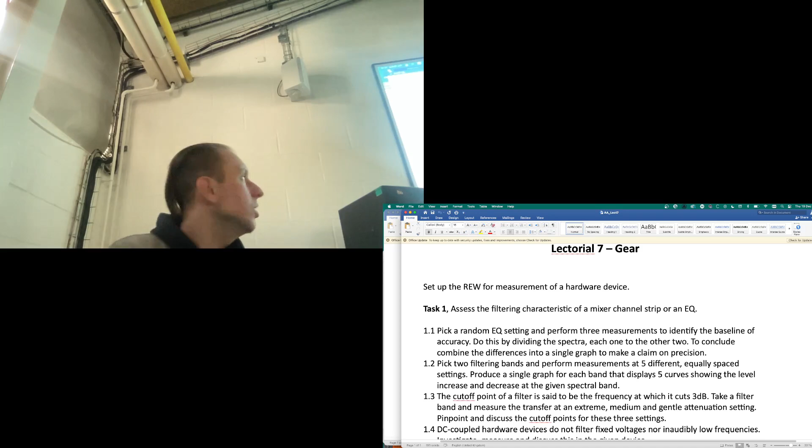So in REW we are doing this by dividing the spectra. And then we can see a single graph that tells us what the baseline is, what we can assume. And on top of that, it's not just a threshold, like everything below 150 hertz is trash, but we can actually express that continuously. We can say that the tolerance increases below 150 hertz, and at 100 hertz it's about 6 dB, at 50 hertz it's already 20 dB, whatever it is. So we can actually quantify that quite neatly as well.

And then what you guys have been doing is essentially looking at the EQ graphs, but measured EQ graphs. And that was quite exciting. Do you remember anything interesting arising from that? The thing was to try and produce a single graph that says it all. This was one of the messages, and also for your final year project, it's still very frequent that we get someone who just appends 20, 30 graphs and says, well, there it is. So please try to avoid this.

A good graph is the graph that you actually spend time looking at, and as you do that, you discover facts about the graph, and obviously if this is part of your thesis, then it's expected that we can read it as well. Okay, so what do you see in this graph?

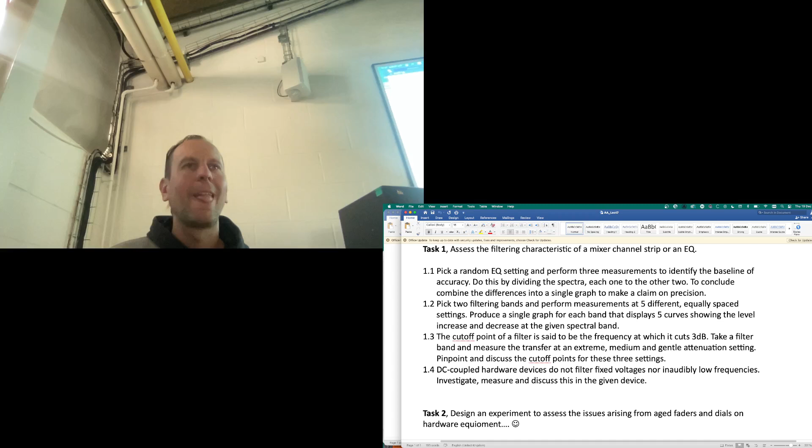And well, maybe it's a good time to get a bit into this because we're talking about filters, and no one else is going to tell you anyway, ever again. I'll try not to get emotional.

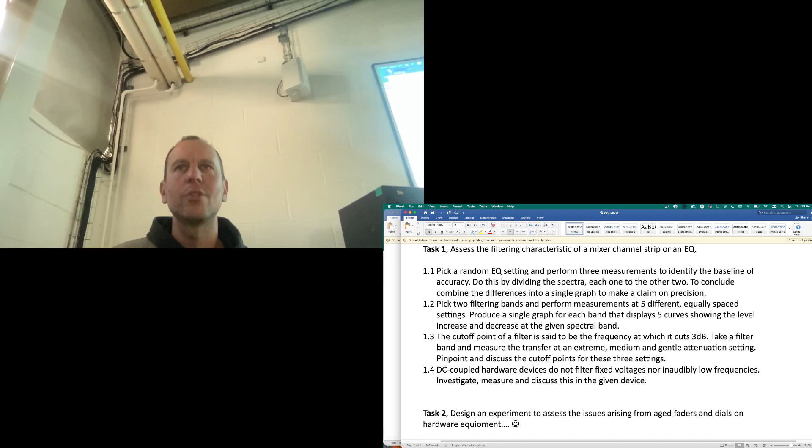But the FFT, as a spectral analysis procedure, does not use filtering. Initially when you start to get into spectral analysis, you're like, okay, I'm interested in what happens at 500 hertz, so I'm probably filtering the rest out in order to find out what's happening there. But actually, no. That would be a filter bank. So you could have a filter bank-based spectral analyzer, and the old analog gear was filter bank-based spectral analysis.

Now, the FFT does a sideband trick. And that's why I'm taking some time to talk about it, because I'm going to talk about sidebands today anyway. And it actually has this DC, 0 hertz trick as well. So I used to teach synthesis and I was hammering on this quite a bit, but I imagine you guys never really questioned what happens if I multiply a sine wave by itself.

I mean, multiplication to start with should be clear. If some of you are doing Max MSP or some other kind of audio programming, you understand that multiplying a signal with a fixed value will change the gain, right? Now, multiplying a signal with a sine wave is actually your ring modulator. So what happens is that if you multiply two sine waves, you get sidebands.

And these sidebands are the sum and the difference frequencies of those two sine waves. Okay? So that's your sidebands. And the interesting thing here, the relevant thing here, is that if you multiply the sine wave with itself, in other words, if you square the sine wave, then you get two sidebands.

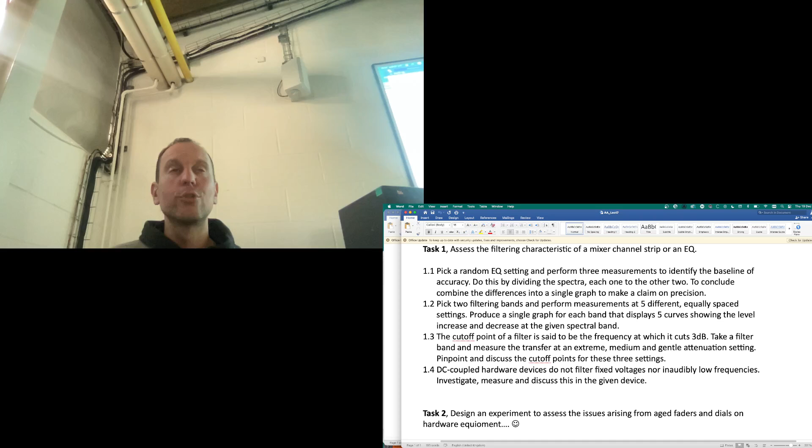and which also says something about the sidebands. So actually I'm gonna get straight to business here in terms of these sidebands. First of all, just a gentle introduction. So I've actually introduced nonlinear distortions, and the main message is you get new spectral components, okay? With nonlinear processes, things that weren't there suddenly exist.

With filtering and linear processes, you are shaping the existing spectral components, but there may be no new spectral components whatsoever. Okay, so in terms of signal processing understanding, that's a huge dividing fact between linear processes and nonlinear processes. So what you then get is, if you put a sine wave into the system, you get that sine wave plus its harmonics. That's essentially what harmonic distortion is.

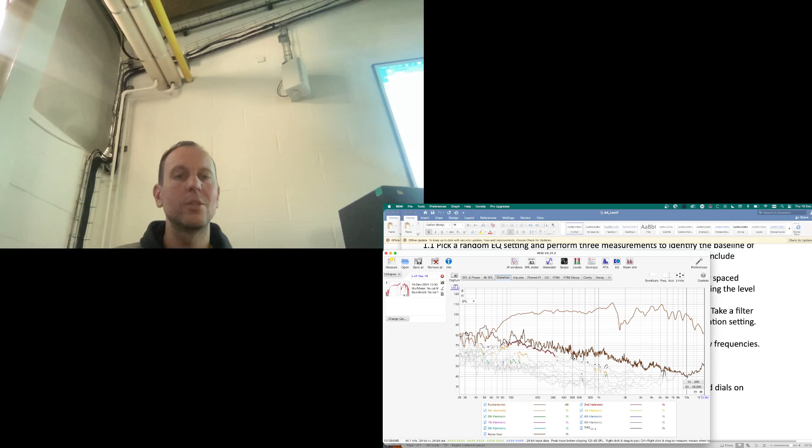And if you do look at the distortion graph, which is derived from the impulse response, or actually from the sine sweep, I should be more precise, in REW, you get to see this picture. So this is my distortion tab here. And what I have then is first the level of the fundamental, which is my spectral response. And then I have the level of each harmonic right there.

So what I see then is how much second harmonic I get for each of the spectral bands that I'm looking at, right? So the point is that you can read this graph. Let's try to read this graph at 100 hertz, okay? So it says that when the system outputs 98 dB of 100 hertz signal, then the second harmonic is at 72 dB. So you can actually read out the level of the second harmonic at a given frequency.

And actually, if you subtracted these graphs, then you can see the amount of harmonic distortion independent of the actual spectral response, right? So you see, for example, at this frequency I have a dip, let's call it 1.8 kilohertz, and then the second harmonic there is at the level of 42 dB. But actually, this is a huge amount of harmonic distortion because the amount is actually the difference between these two graphs. So this holds then for all the harmonics as you see them, and typically they drop in level.

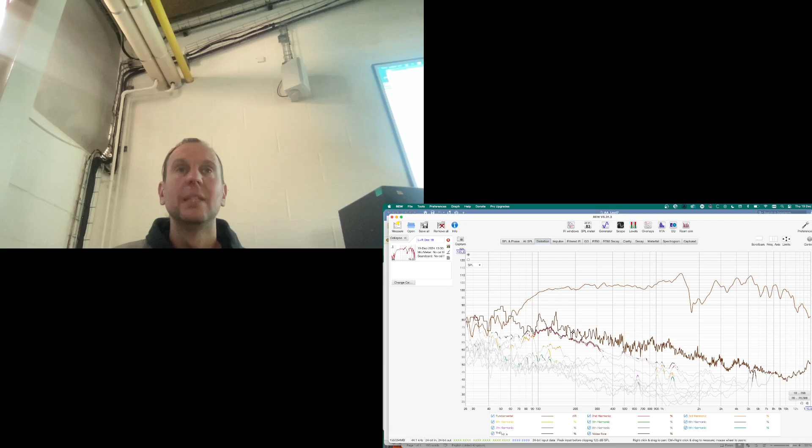But essentially, it's really important to note that having an increased amount of harmonics generated by the system may actually sound good and better. Okay? I mean, if you are trying to make music that sounds forceful, loud, present and strong, you actually depend on harmonic distortion quite a lot, right? If you have a very excellent linear speaker, it's much more difficult to get it to sound like it's really doing it, right? So actually, suboptimal speakers can do great service to providing that sound of aggressive, forceful,

you name it, which is quite obvious because that's where distortion first arose in our understanding of things, which is small guitar amplifiers being whacked up and then people realizing, oh, well, that's a really interesting sound, right? Because initially it was like, well, don't use the amplifier in the nonlinear range because it's not amplifying the guitar, it's giving you a lot of rubbish. But actually that rubbish has gained a huge appreciation in terms of its musical characteristics.

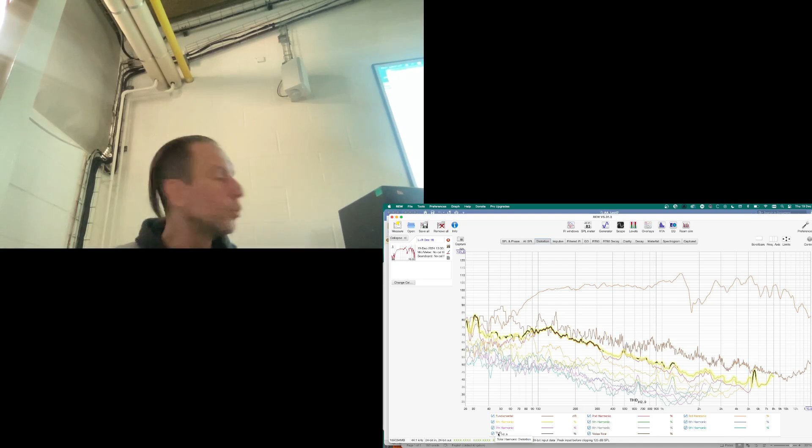So actually the thing with harmonics is fairly straightforward. I kind of expect you guys knowing most of this already anyway. There is a measure of total harmonic distortion, which is kind of all these harmonics added up. This should actually be a good flash, hopefully, that next time you see a THD expressed with a number rather than a graph, you do feel a bit underwhelmed by the engineers who have done that, because now you see an actual THD graph and you see that the amount of harmonic distortion varies greatly in different spectral regions. And if you want to know more about the system, that's what you need. And if you just express it with a single number at 1 kilohertz, it's kind of underwhelming.

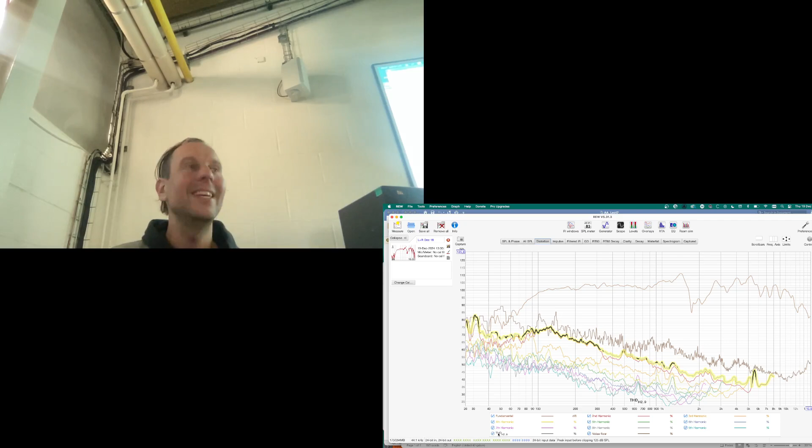Okay, so that's the harmonic distortion. That's straightforward. The really exciting thing is the intermodulation distortion. So this is the next chapter, and the intermodulation distortion has a link to sidebands. That's why I started talking a bit about sidebands. And you may know that AM synths produce sidebands, right? Ring modulation produces sidebands. In fact, frequency modulation is also a sideband producing synthesis algorithm. The difference is that FM will produce higher order sidebands as well, whereas amplitude modulation and ring modulation will produce only first order sidebands. So first order sidebands are A plus B and A minus B, right? So you get a sideband essentially when two sine waves interfere, and if there is a nonlinearity involved.

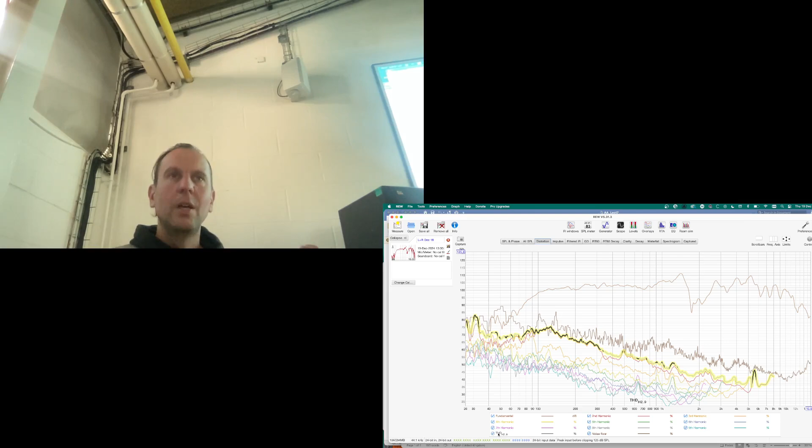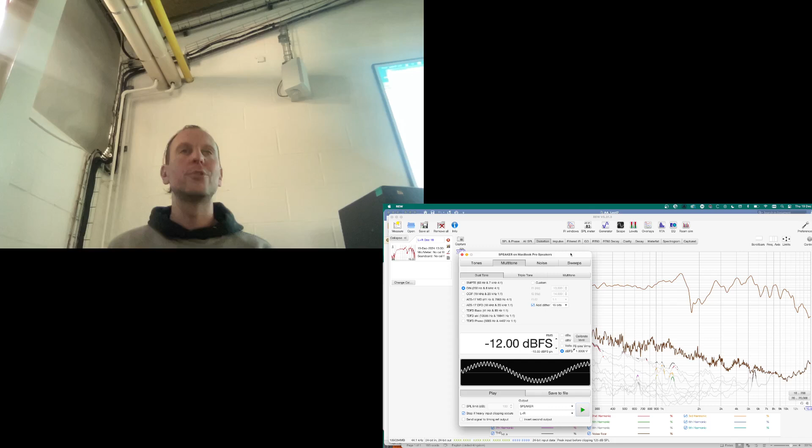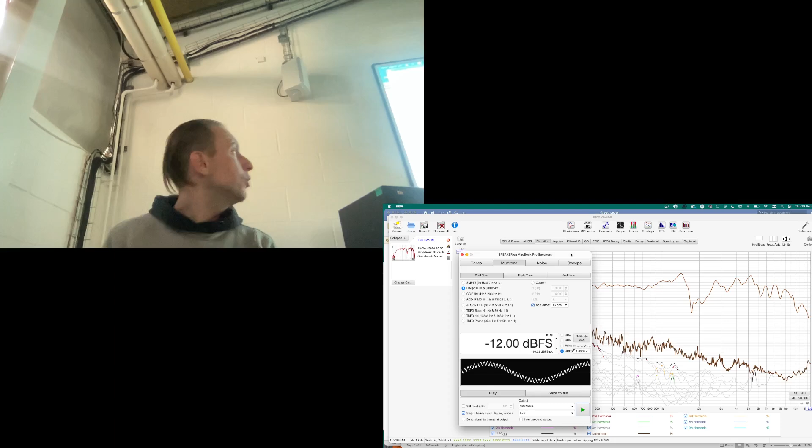So that's the point. If I'm just looking at harmonic distortion, one sine wave is plenty. Deal done. If I want to see anything about intermodulation distortion components, I need two sine waves. I will never discover it from looking at a single sine wave. Okay? Hint, that's why there is no intermodulation graph in the distortion plot, because it was measured with a single sine wave, right? So to measure intermodulation distortion, you need two sine waves, and they need to be of a different frequency. And as I said, what you get then is you look at the sum frequency and the difference frequency. So here are some standard sine wave pairings.

So SMPTE is obviously problematic because some of the systems that we're looking at, if it's speakers, typically have issues at 60 Hertz already, right? So for speakers, we very frequently use the DIN, where we have the 250 and the 8 kilohertz. So if I play these two sine waves through a speaker, there will be harmonic distortion. So for 250 hertz, I will get twice that frequency, 3 times and so forth, all dropping in level. I will get the same for 8 kilohertz.

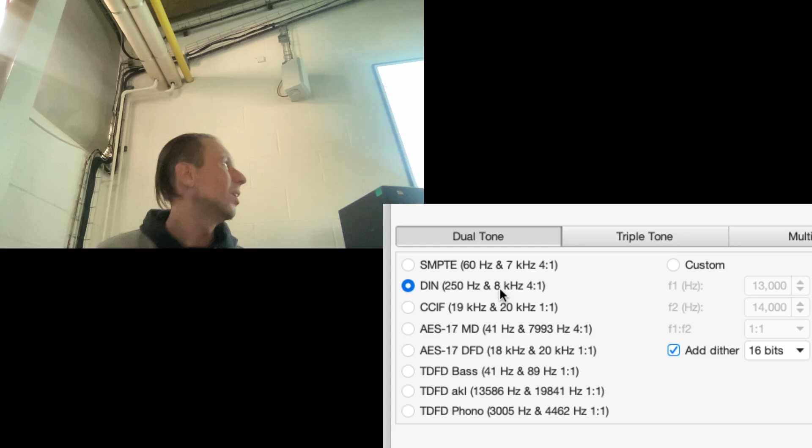But the interesting thing is that I will also get a frequency of 7,750 hertz. So that will be 8 kilohertz minus 250. I will also get a spectral component at 8,250 hertz. And that's what happens. So those are your intermodulation components.

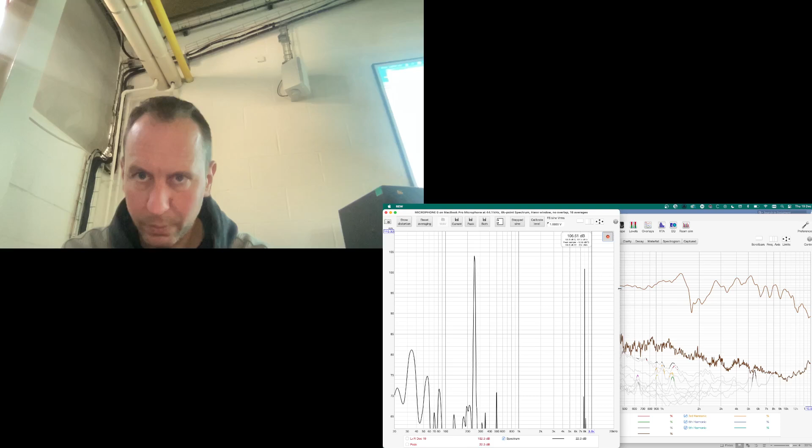So I can actually see them live as well. So I will play this. And then I can do a real-time analysis window. Okay. And the point is that if I am in a linear region without much distortion, in fact, if I'm in a totally linear region, then there will be no sidebands. Now, obviously, here my speaking voice is recorded as well.

So you see, now can I freeze that? Okay, so you see at this stage, I'm seeing the two frequencies. I see the 250 hertz and I see the 8 kilohertz and not much else. Some kind of rumble is coming through as well. Okay, now the point is that if I increase the volume, then those are your sidebands. Okay, sorry, I should say intermodulation components.

So you see, the math is the same. A plus B, A minus B. Sum frequency, difference frequencies. The same math for sidebands, which is the term we use when discussing sound synthesis, just as it is the same math for the distortion when we call it intermodulation components.

By the way, I think Pauline Oliveros at some point made pieces for accordion, which were actually trying to make people realize that there are such things as difference tones. So in accordions, if you have really pure sounds, you can actually hear out these frequencies.

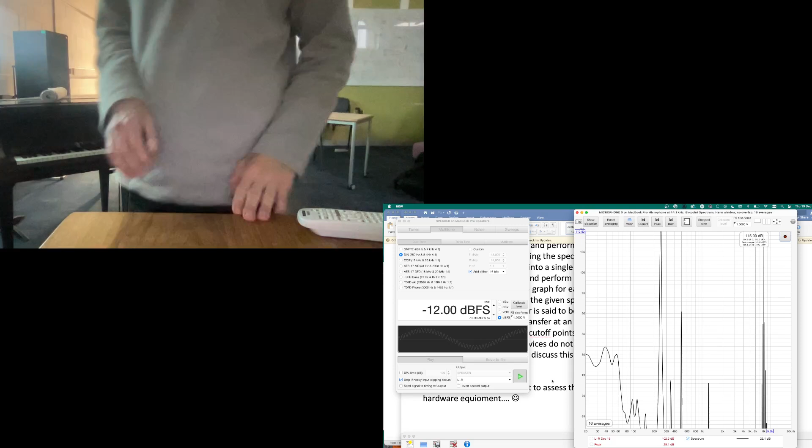I have asked at one point, I like to hang out with people who are much more clever than I am in this stuff, and I've tried to get to the bottom of: okay, but how can I design a distortion whereby I can control the amount of intermodulation components? Right, that's the interesting thing. And I didn't really get an answer that I could interpret as clear.

But the interesting thing to add here, now that we're talking about these distortions, is that obviously distortion is, in most cases, amplitude dependent. Okay? So if I'm in a linear region, there is none, and then they start coming up. Now, the really interesting thing that we discovered some time ago, and we've named it harmonic instability of distortion, is that certain distortion algorithms, devices, will have a fairly monotonic increase in the harmonics.

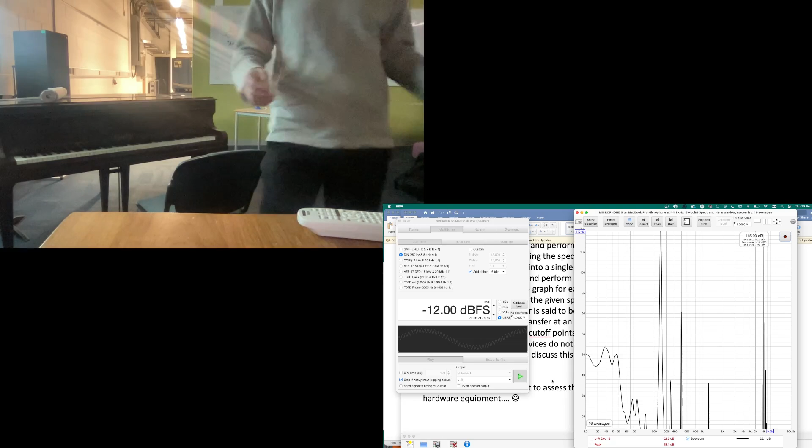Okay? So it's interesting to consider, and then we can come a bit to the Volterra series as well. Because you see, the interesting thing is that if I look at this distortion graph here, what's missing? Where is my distortion graph here?

Hello. Okay, let's get rid of these. Get rid of everything. Bloody hell, there's a lot of things here. Okay, can I see it now?

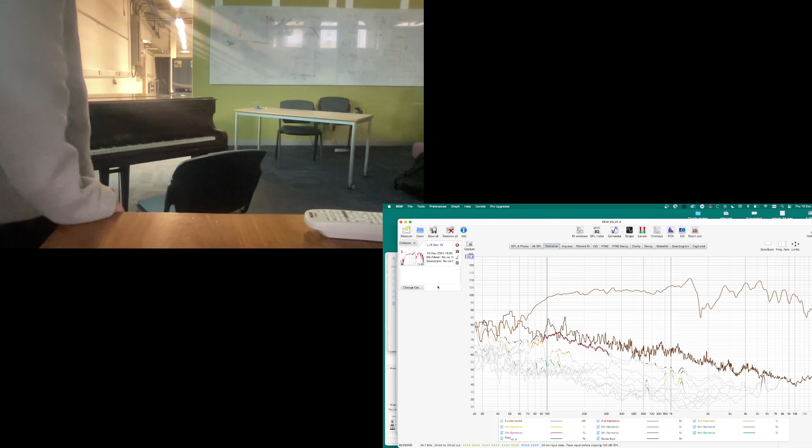So this distortion graph, what's missing? It's really lovely that we can see things across the spectrum per harmonic. Obviously the intermodulation is missing. But there is another thing missing. The actual variable amplitude is missing, because the distortions are very dependent on the amplitude, and this is just a fixed amplitude thing. Okay, so what I can do then is I can try to make another one.

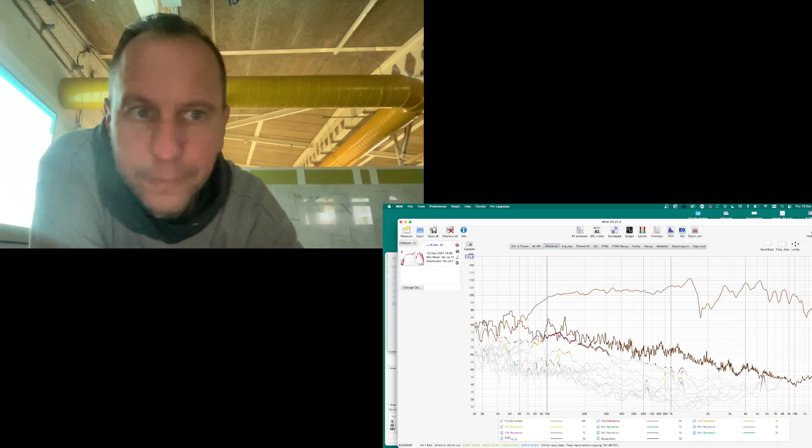So let's do a really loud one. It's probably going to clip anyway. Well, I really push it to the limit. But anyway, we don't have too much time.

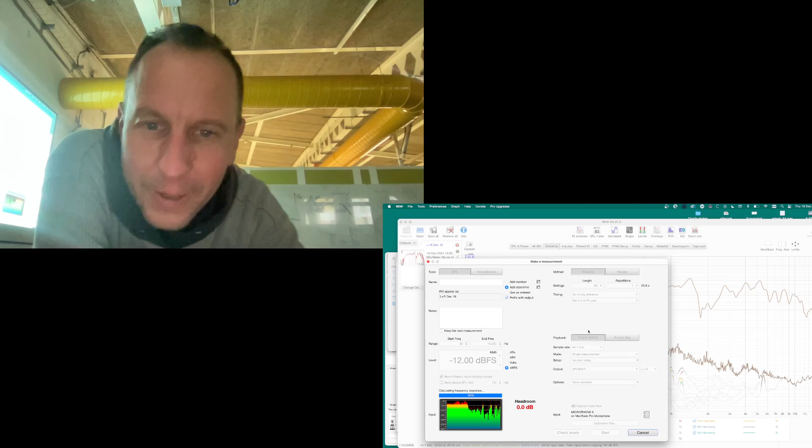But the point is that if I do a plot of distortion with loud settings, you see it here already, this one is much louder. You get these really nasty loud harmonics coming up. And if I do it at a low level, they just won't be there as loud. Okay? So even if this graph looks very informative, bear in mind that this is at a single amplitude level. And the main thing about distortion components is that they're dependent on the amplitude level.

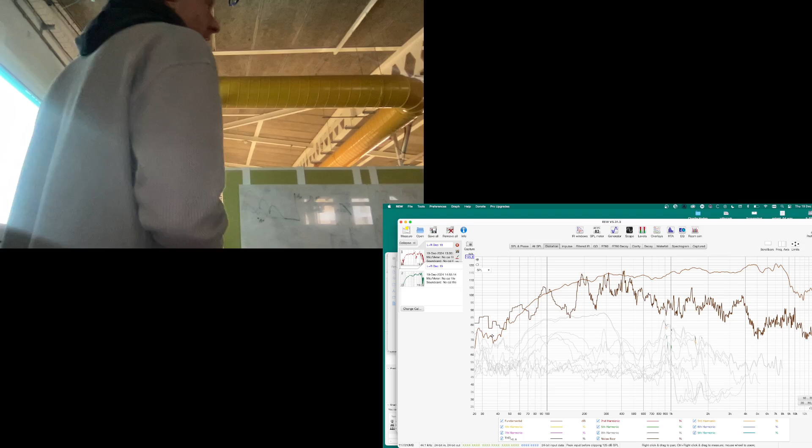And this is where the Volterra series comes in, because the Volterra series actually contains such graphs for all the amplitudes. Okay, so it kind of becomes the three-dimensional distortion plot. And that's actually the way you can come close to analyzing what a device actually does. And you will have models of devices built using this technique, right? Because if you know, at every amplitude level, for every frequency, what are the levels of the harmonics, then you have a really good description of what the system does. Okay, and that's your Volterra series.

I mean, I'm not even aware, how are you coding it? You said you're trying to code it? Well, I don't think I'm actually going to code it. It's just a prototype on paper at the moment, and then I'm going to try to implement it. But it's tricky. Yeah, I'm not aware of it being part of Max MSP, not even SuperCollider, which I would expect. But if you take something like MATLAB or Python, it's in there. So if you're code savvy, you might be able to get to a Volterra series in that way.

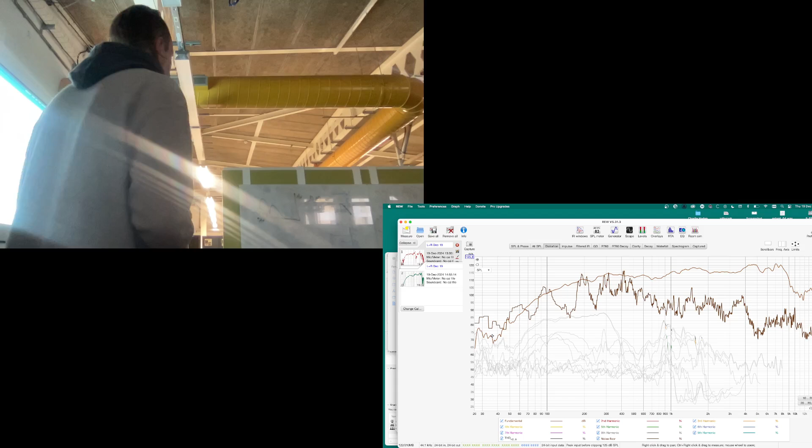Cool. Any questions? Did we discuss all of the interesting bits about distortion, nonlinearity, transfer function, odd and even harmonics, intermodulation components? I mean, part of the story is that we have intermodulation distortions as well. Technically, they call them distortions. We are music techs, so we typically don't.

So we are actually talking about the arising of new spectral components. So the message is that every nonlinear process will induce harmonics, right? So this means that the compressor must distort. Okay? I mean, even though it's smoothed out and all the rest of it, it doesn't distort as much as the saturator does.

But excuse me? You guys use the piano? No, but we have a class.

I'm sorry. So you see, every compressor must distort. Every nonlinearity must distort. That's a thing to take away on a surface level. So actually, every dynamics processor is a distortion engine, and every distortion is also affecting the dynamics. If you dig it, you can come up with examples where it's not obvious or negligible, but these terms are interrelated.

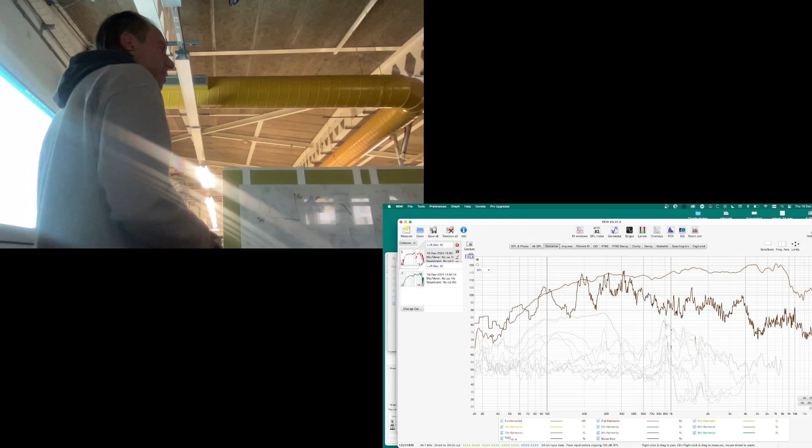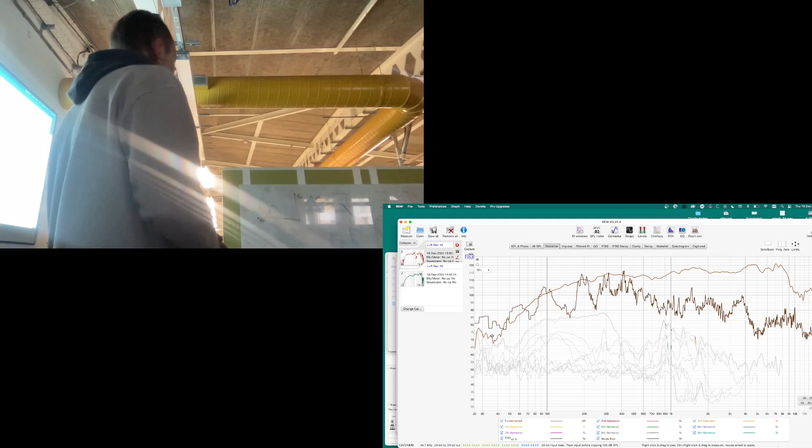A bit like time and frequency as well, right? So in most cases, they're just separate terms, and we are happy with that. But actually, if you dig into the matter, you realize that there's some necessary interdependence of these terms here as well. All right, that's that then. So just a brief introduction.

What I have for you guys in terms of the exercise is assess the distortion characteristic of some gear or other. Again, same like that week, you can get it from the text. So first thing is pick 5 equally spaced amplitude levels. So that's about measuring, seeing that at different input levels you get different amounts of harmonic distortion.

Now assess if there is a noticeable difference in even and odd harmonic levels. You should already be able to predict whether there will be or will not be. I don't think we have any tube amplifiers to test, but they would likely give you more even harmonics. In fact, I didn't really pay attention to that here, because here I do have the second harmonic, and then the third harmonic. So actually the second harmonic is way above the third.

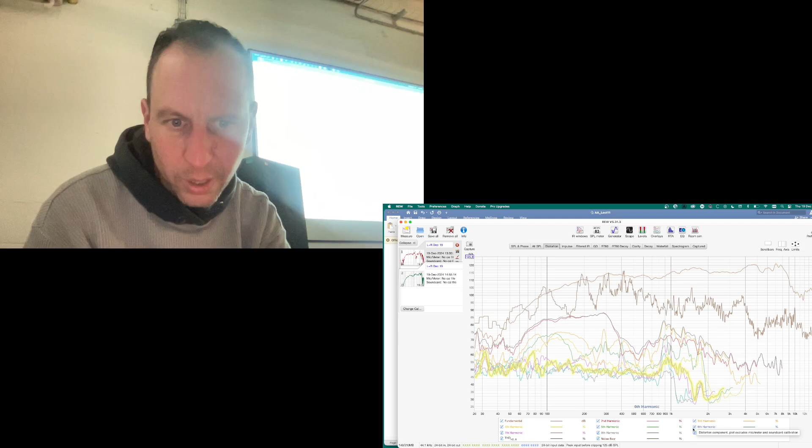Am I saying this right? Let me just look at the second and the third. So real life situation, even though I don't assume that there is an asymmetry in the transfer, there is second harmonic just there. Here's the third harmonic. But you see that what is likely to be the case is that the even harmonics have a similar shape.

In a way, the anomalies, for example, this peak aligns, this kind of looks a bit like that, that peak aligns. Whereas if I have the third harmonic here, I have this thing here which doesn't really match to anything in the even harmonics, but it might have something that matches to the fifth. So you see, they kind of behave together. Oh, you hardly see that.

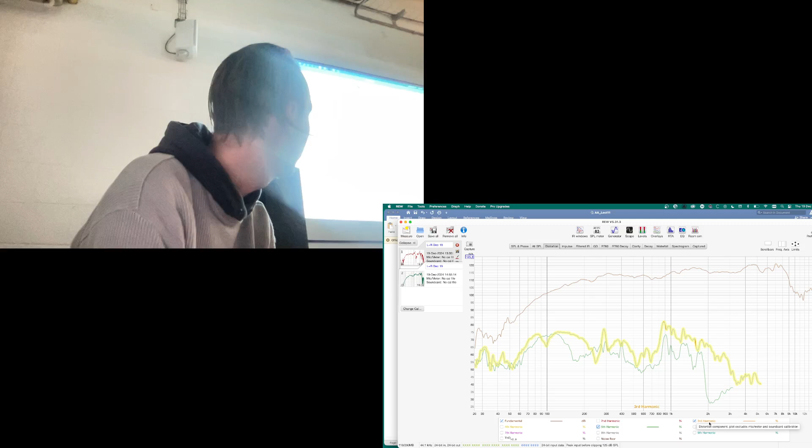I cannot say there are no even order harmonics there, but I do see that there is similarity in how even harmonics go up and down and how odd harmonics go up and down. Hint, probably not. But nevertheless assess it.

And then it says pick 3 equally spaced frequencies, which is a bit of a, let's see, you guys deserve a BSc in music tech. If I ask you to give me 3 equally spaced frequencies between 50 Hertz and 15K, can you do it? Huh? I'll go over this math.

This is one of those things that, I don't know about you guys, but I've obviously studied this at some point as well. And I can clearly remember the moment when I realized, oh, that's how you can divide a spectral range in 3 frequencies, and it made me very happy. So I'll try to transmit that emotion in a second. So this kind of equal spacing in frequency.

And then what I'm saying is play 2 sine waves that would produce a first order intermodulation component at those frequencies, okay? So I'm obviously pushing it here. So first of all, this bit of math. The interesting thing is, in frequency, I think I've said some things about this, equal distances have to do with equal multipliers, right?